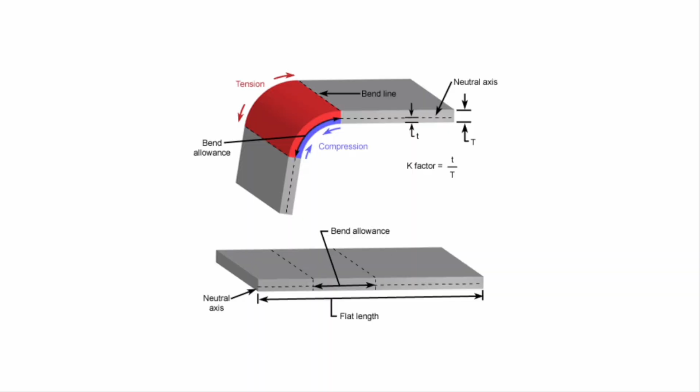When this internal bending radius is less than 5 times the sheet thickness, the neutral axis, where there is no tension and no compression stress, is no longer centered. It shifts toward the inner side. So bending causes stress, and with stronger metals and tighter bends, you risk getting cracks on the outside of the bend. For thin sheet metal, you've got two options.

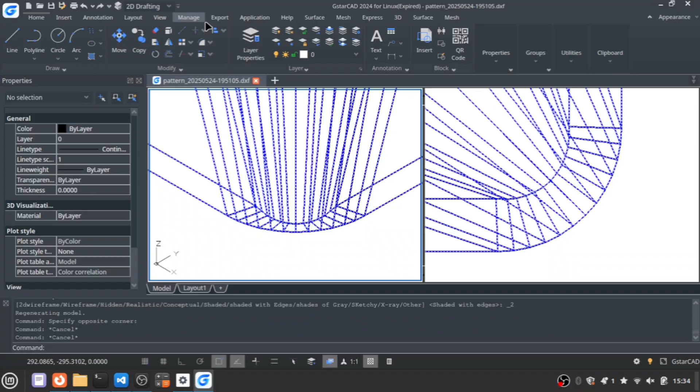Use the minimal internal bending radius allowed by your material, and that's the sharpest corner you can get without risking cracks. Or tip number one, use an internal bending radius of 1.29 times the thickness and make notches or cuts at the corners so you relieve the bending stress if needed. This gives you a corner joint on a rectangle end.

The actual bending should happen at a place where you already have an acceptable bending radius. In this case, bending or having a corner joint means the same developed length. I will draw a square to round transition using 1.29 times the thickness as an internal bending radius.

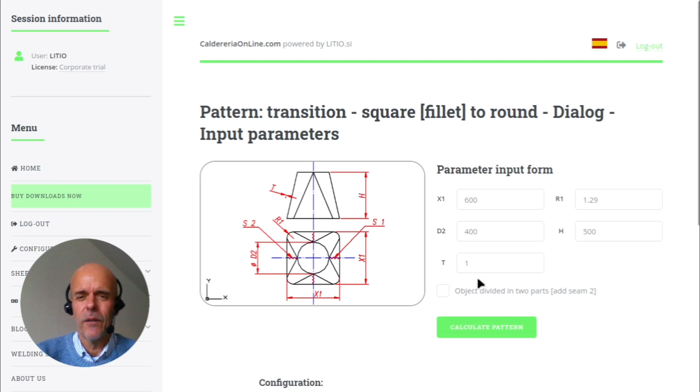So here I am in caldereriaonline.com. I will do this square to round transition using 1.29 as the internal bending radius. So this is 1.29. I am using internal dimensions. I will do this in two parts. I calculate the pattern, and I will download this and open it in my CAD.

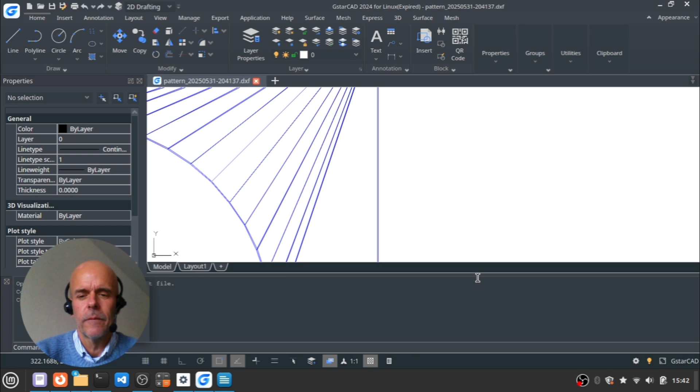So here I am in my CAD. I will open my last download. And as usual, we get the 3D representation and the 2D development. And this is the sharp corner we get.

Now, about that 1.29 number, where does it come from? That's the value where if you consider the bending line as either a cut or a bend, the final part dimensions turn out the same. It's based on sheet metal bending formulas from standards like DIN 6935. To show this, I will draw a square duct in two ways. I'll input the same dimensions in a hopper pattern, calculate it, and download the DXF.

Then I will do the same using the rectangle to rectangle pattern, entering the same internal dimensions and setting R equal to 1.29 of the thickness. So, tip number two, to create a duct on a hopper or transition dialog, just set all the offsets to 0. And tip number three, remember hopper dimensions are always internal. I will download both developments and compare their total developed lengths.

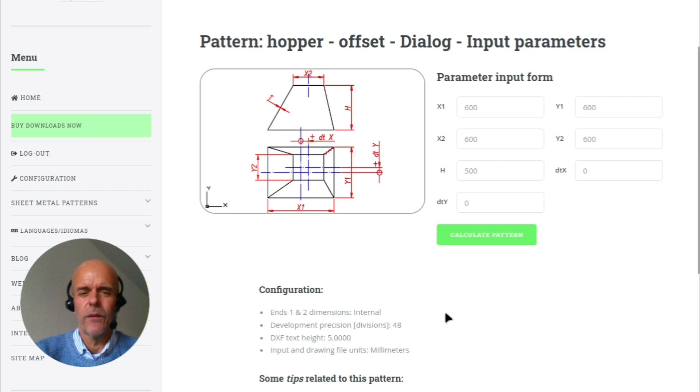So I will start with the hopper. So remember, dimensions are always internal for hoppers. We have the square 600 by 600 on top and bottom, and this is centered because of the offsets equal to 0. I calculate the pattern. This is very easy. I download the file and I will make the same with a rectangle to rectangle transition.

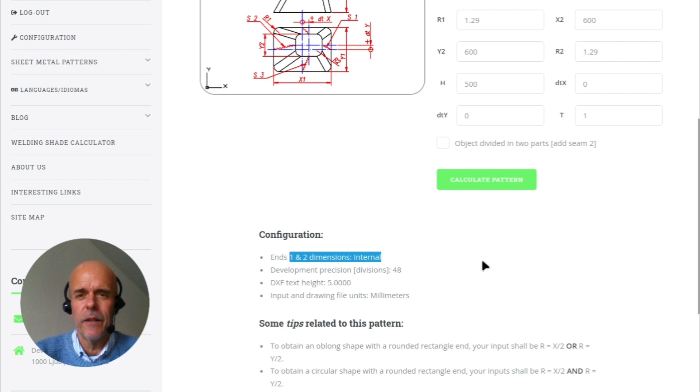So back here, I will pick this one. I will enter 600, 600. Being the thickness 1 millimeter, the internal radius will be 1.29. Offset 0. I will do this in one piece. Again, dimensions are internal, and being thickness 1 millimeter, the internal dimension for the bending radius is 1.29. I calculate the pattern. Again, it's very similar to the first one. I download this and I will open this too in my CAD.

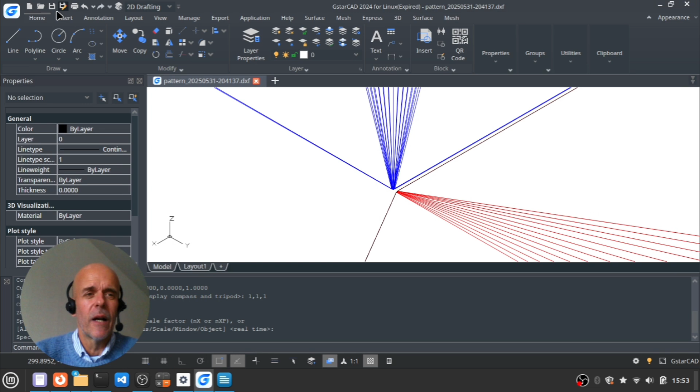So back in my CAD, I will first open the hopper, and here it is. And I will also open the last download.

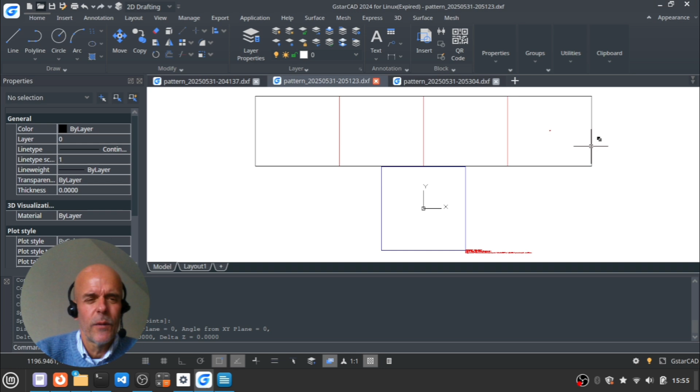I compare distances. 2,400 millimeters. 2,400 millimeters. There is a tiny difference that comes from the rounding of the 1.29 value to 2 decimal places.

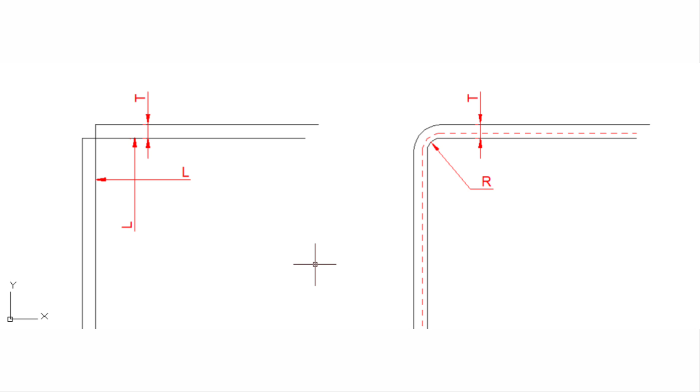And here we have a final tip. Tip number 4. If you are using the hopper pattern, you can either cut and weld the four sides as shown in the DXF, or bend them instead using the cut lines and bending lines, as long as you use a bending radius of 1.29 of the sheet thickness. Keep in mind your material still needs to allow the radius without cracking.